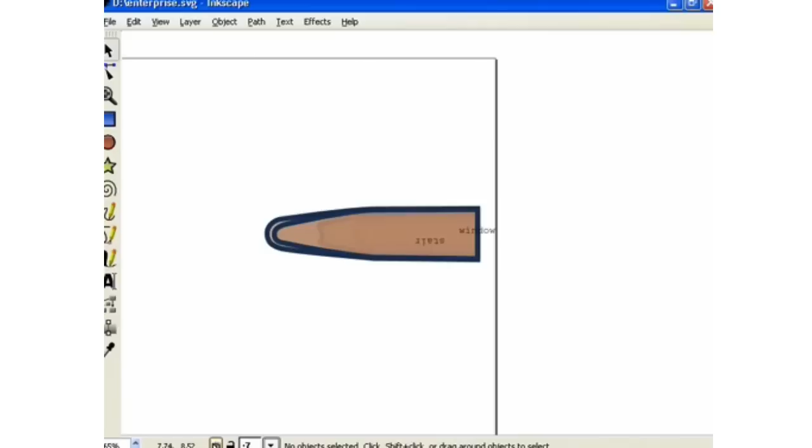So what you're seeing here is Inkscape. Inkscape is an open source illustration program very similar to Adobe Illustrator. I grabbed it—I'm a technical artist who's partially a programmer, so being able to take some software off the shelf and use it is something I can easily pick up on. So I drew a couple shapes, and I just unveiled the layers that I drew them on.

I'd like to think of Levelshop as a word processor for level design. I might have taken it a little too far, because there's a bit of chaos here with all the words I'm writing, like door and window and stair. You'll notice later on that the latest iteration of Levelshop has a much cleaner interface for those types of things.

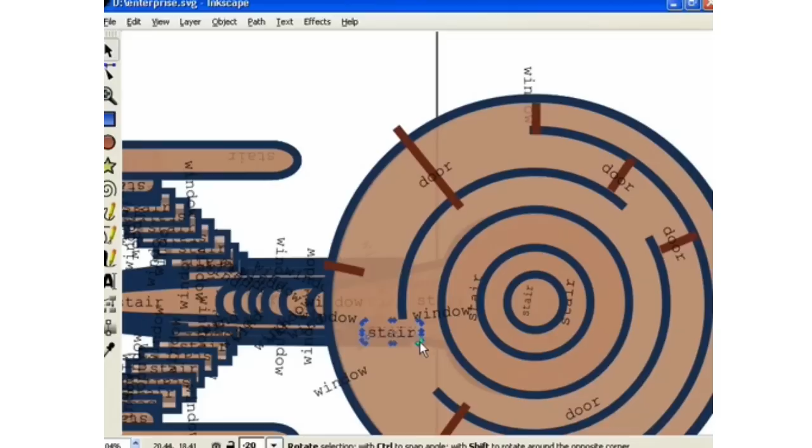Now we save the file out, and it's an SVG file, scalable vector graphics file, which is an XML file. We do some parsing in Python, and we use Houdini, which is a fantastic 3D package on par with Maya and Softimage, and it outputs a game-ready file here that we load into Unreal.

We're running at double speed just because it's a really large level. Where we wrote stair, we have a ramp with a hole in the ceiling, and where we wrote window, we have a round portal. You'll notice textures on the floor, on the ceiling, on the walls.

My drawing board time was about an hour, and my 3D construction was about 10 minutes, and it's much improved these days. So what Levelshop does is go from drawing board to prototype.

So I have a 2D floor plan of the Starship Enterprise. It's not even a really good floor plan because it has no elevators, and who knows where the medical bay is. But I've been able to do it very quickly—I did it in about an hour. That's a very important thing to do when you're at the drawing board phase.

I feed it to the Levelshop machine, and it machines out a prototype ready to run. That's what I did—I loaded it up into Unreal and ran around and realized that not having any elevators is a horrible design flaw. You should definitely put those in. And that informs me that I should go back to the drawing board.

This whole drawing board to prototype workflow is a time-honored tradition used in many industries. If you're an automobile designer, you'll be creating dozens of design sketches, testing out curves and colors. At some point, you might take one of your design sketches and mill it out into a scale model, to make sure your aesthetics are correct and there are no design flaws before you go into production.

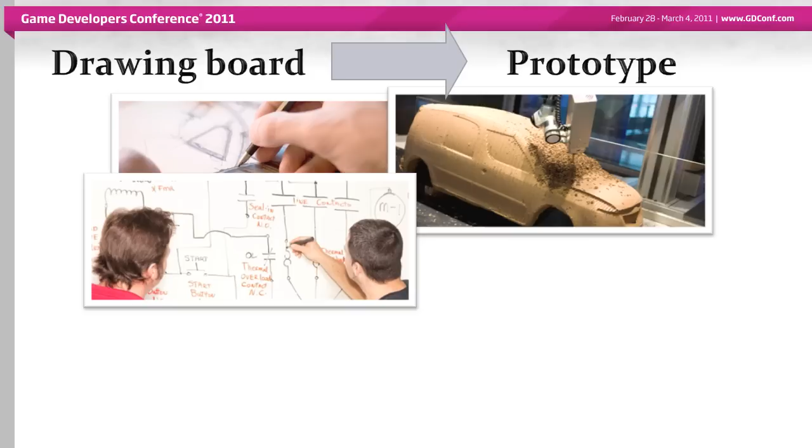If we imagine Steve Wozniak designing the Apple I, he might have drawn some circuit diagrams on a whiteboard, or maybe back then it was a chalkboard. He'd be testing out various chips and permutations to see whether he can get better performance or reduce the cost of his chip count. At some point, he might make a prototype, something like a breadboard with the actual chips, where he could determine if the logic he designed in the circuit diagram works in the real world before he manufactures 500 Apple I motherboards.

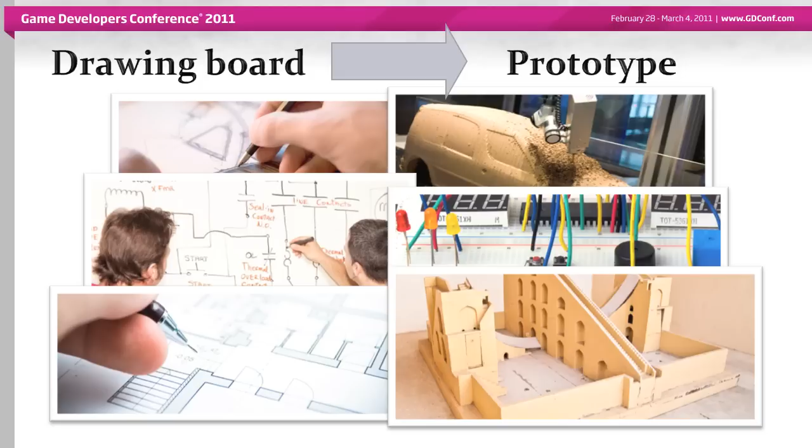If you're an architect, you'll be making various blueprints of your building layout. But you might decide to make a maquette because there are some things you can't evaluate at the drawing board stage. If the sun shines from a particular direction, what do the shadows look like? If you look out the window, do these towers block your view? So the prototype is a great place to evaluate your design decisions, and the drawing board is a fantastic place to just get your ideas out of your mind and onto paper.

So what does Levelshop add to this time-honored tradition? Well, it takes the drawing board phase, which is a very fast way of getting ideas onto paper, and the prototype phase, and it merges them into the same step. So basically, you draw a floor plan that uses the same amount of energy as those other drawing board methods, the design sketch or the circuit diagram or the blueprint.

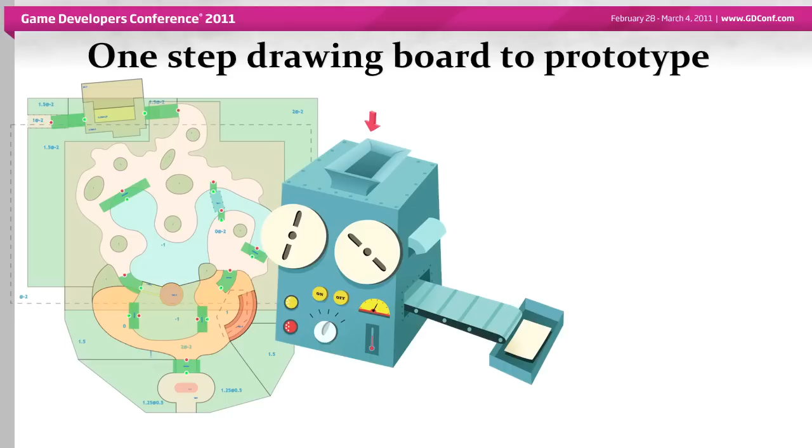And you feed it to the Levelshop robot, and the robot spits out a fully playable mesh where you can determine if your design decisions were correct. You can see whether this combat area is large enough, or climbing over this ledge is the right distance, or this incline for this ramp is what you want, before you go into production.

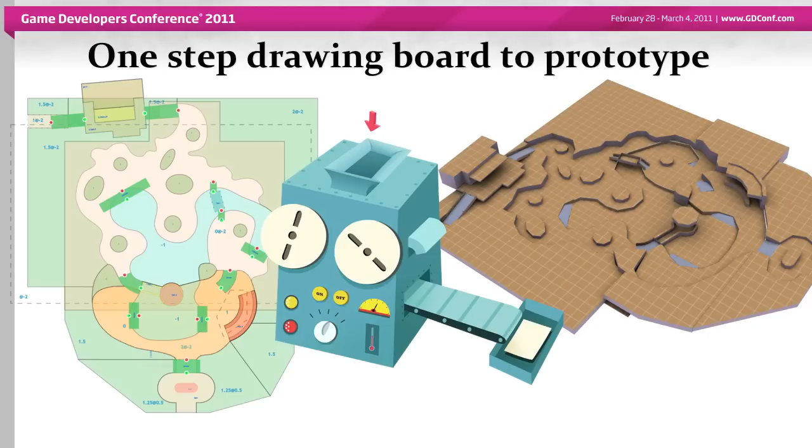That's a zone where he's strategizing about gameplay. That's the mental space where you want him to be if you're a producer. You want to make sure your level designers are thinking that way. Dale was able to use Levelshop to create dozens of floor plans, and at a push of a button, he has a dozen prototypes. From those prototypes, he can play them in-game and determine if the moment-to-moment layout guides him to the end.

So my target is the level designer, empowering them to stay in that zone.

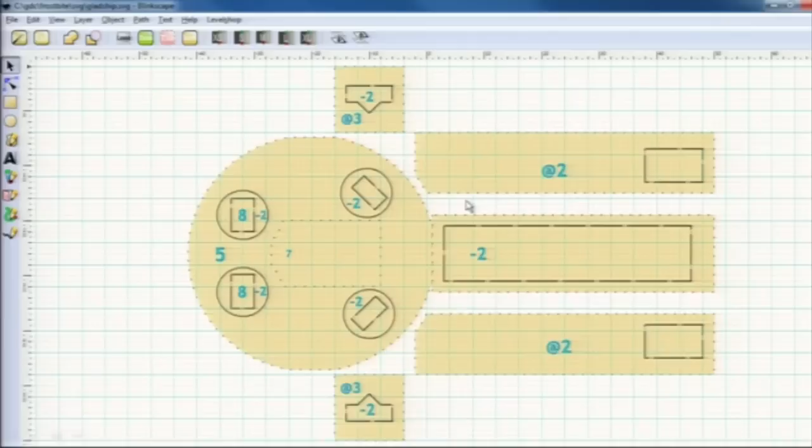And we use the floor connector. The floor connector connects floors. This particular room is at ground zero, and this room is 2 meters off from ground zero. These floor connectors will create corridors between these two rooms, and they'll ramp up from here to here also.

There's a lot of context-sensitive ways of drawing, too. If I draw a floor connector inside a room, it's going to be a walkway instead of a corridor. I'll make a compound shape here by taking these A to B walkways and creating another A to B walkway, another A to B walkway, and then type in a number at the end.

So now what's happening here is, in a Lego-like style, I just have a ramp that goes from the floor up 3 meters, this catwalk goes over to 3 meters, and then back down to the circle room. I've made this compound shape just by putting these simple shapes together. We're going to add more walkways, little struts between there, so we can join those two compound shapes.

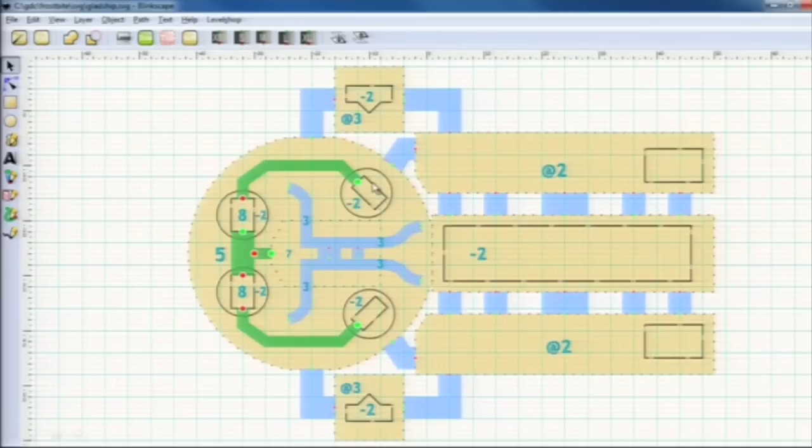Now we look at the roof connector. Remember we had these towers, 4 meters high, with railings around them. We're going to connect the roof. The roof connector is a misnomer—it's actually connect to the highest surface.

But that's hard to remember, so 'highest surface connector' doesn't roll off the tongue as well as 'roof connector.' So roof connector it is. This example here will show you that it's actually connect to the highest surface.

This roof connector here is going to connect to the floor because there is no ceiling, and it's going to touch the highest surface on this particular block or room, which is the top of that, at 4 meters from that surface.

We put some roof connectors over the swimming pool, so now it's less of a swimming pool. What it's going to do is connect to the highest surface, which is the lip of the swimming pool. We're able to also cross these roof connectors and overlap them, and you'll see some nice action happening over here between the junctions.

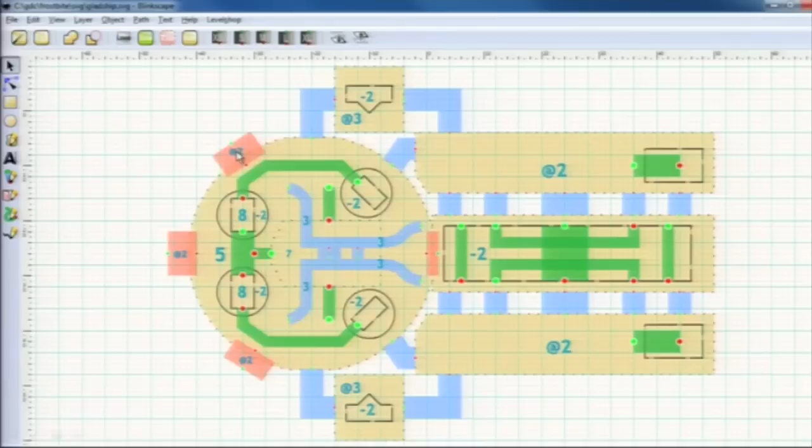Now we use this portal connector over here, and we want to be able to go from the swimming pool room to the circle room, so we just connect those two rooms together. Then we'll add some more portal connectors at the front here, and using our text tool, instead of having them be doors, we'll offset them with @2 so they'll be 2 meters off the ground and become windows.

Levelshop generates this mesh for you. I'm going to point out a couple things to show you what Levelshop is doing behind the scenes. So we have a swimming pool here, it's got the railing, you have the roof connector, and it's cleared the railing so you can walk across that surface, and the junctions are cleared up so you can walk all the way around there.

Remember, the swimming pool is at ground zero, and this surface is 2 meters off, so these floor connectors will ramp from the swimming pool floor to the floor of this particular room. You'll notice that those floor connectors automatically create portals so you can walk between the rooms.

This walkway went from the ground up to 3 meters, automatically creating a portal here, and then you can walk around this catwalk. Those struts automatically clear up that junction area, and then you walk over here at 3 meters, portal automatically created, and you can walk down again.

These towers here, that's a 4 meter high tower with a railing, and then it does a roof connect to the 8 meter high tower, and then this does another roof connect to that 7 meter high wall.

You notice I added some lights here—that's actually markup 101, and you type in the word 'light' and change the text to green, and then a light shows up. But that might be a bit complicated—I'm being sarcastic there.

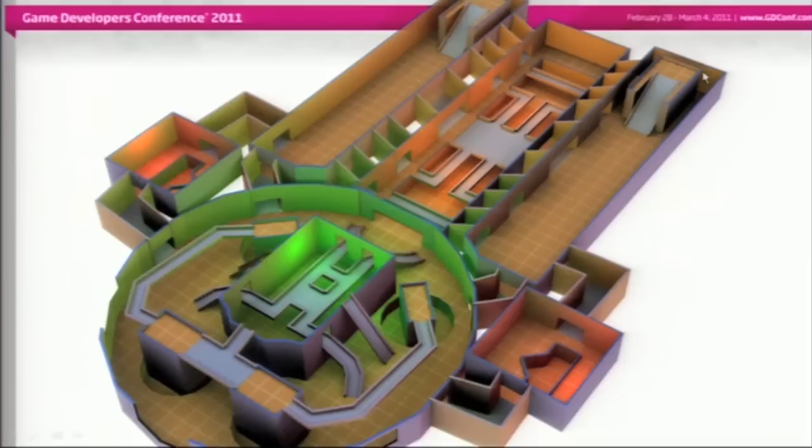So the back room here, you'll notice it cuts, it does what you expect it to do, which is cuts a hole in the wall, cuts a hole in the floor, and so you can walk up to the top of that surface.